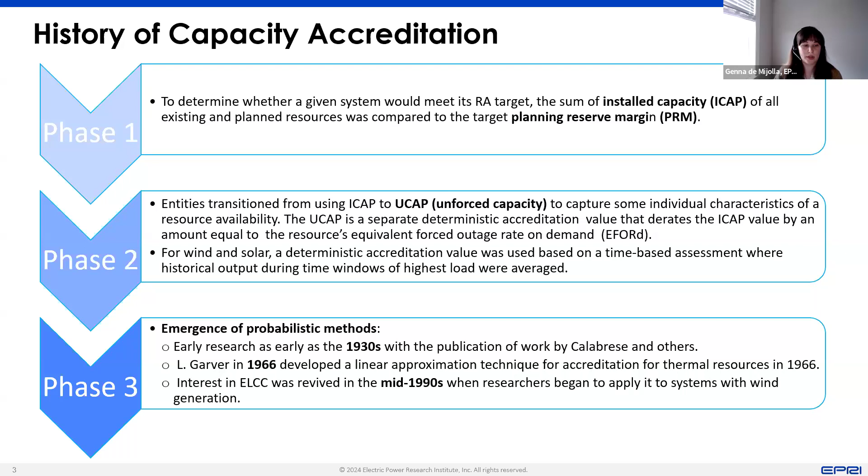Now in phase 3, we're really starting to lean more and more on probabilistic methods, ELCC being the best known one. I do want to highlight that some of the groundwork for these probabilistic methods started a while ago - the 1930s had early research on this, and 1966 saw work on developing a linear approximation technique that was really instrumental. But it wasn't until the mid-1990s that we started looking at ELCC and considering it much more seriously, applying it initially to at least systems with renewable and especially wind generation. So that's a quick overview of the history of capacity accreditation.

The next thing I want to touch upon is this idea of probabilistic versus deterministic metrics. If you think about the history I went over, initially we were more on the deterministic side of things.

So your ICAP and your UCAP, and looking at average generation over historic peak hours, those are all considered deterministic methods. You don't necessarily need to run a probabilistic resource assessment to determine capacity accreditation with those methods.

And then we've got the whole probabilistic piece of the puzzle. I'd say there's two broad categories there, and you can split it up a few different ways, but this idea of marginal versus average accreditation. I won't touch on that too much since Kevin has a talk on that right after me, but it's a useful framework to keep in mind.

One thing I want to highlight is I've noticed that ELCC is sometimes being used increasingly to just refer to everything on that probabilistic accreditation method side of things. ELCC does have a specific methodology to it historically. There are other related methods that are also probabilistic and share a lot of common features with ELCC, but might not be exactly categorized as an ELCC metric.

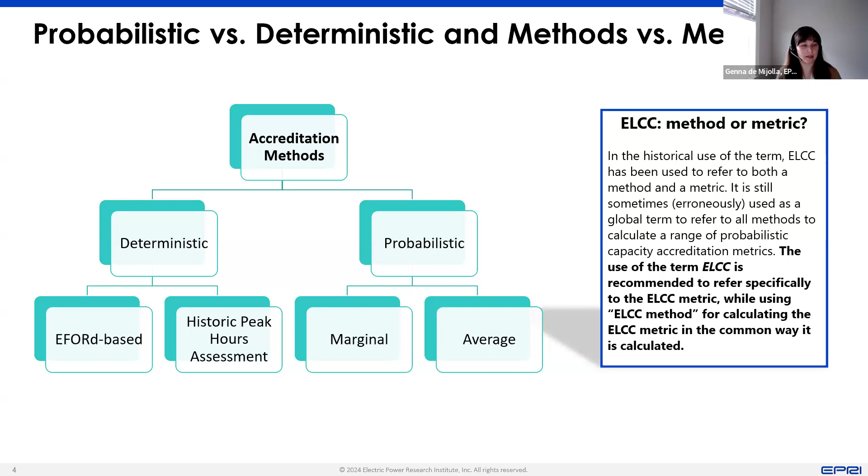The other thing I wanted to touch on is this idea of bringing a system to criterion, and that's been the norm. Often we use an LOLE of 0.1 days per year, at least within North America. That's been our historical reliability target. So most of the time, you establish that target and then bring your system to criterion before calculating your capacity accreditation metric.

This can be done a few different ways. You can adjust your load up or down, add perfect capacity, or adjust the retirements in your system. There's a few different ways to go about this, usually a bit of an iterative process. But it's important to understand that the way you do this is going to impact the value of your capacity accreditation calculation.

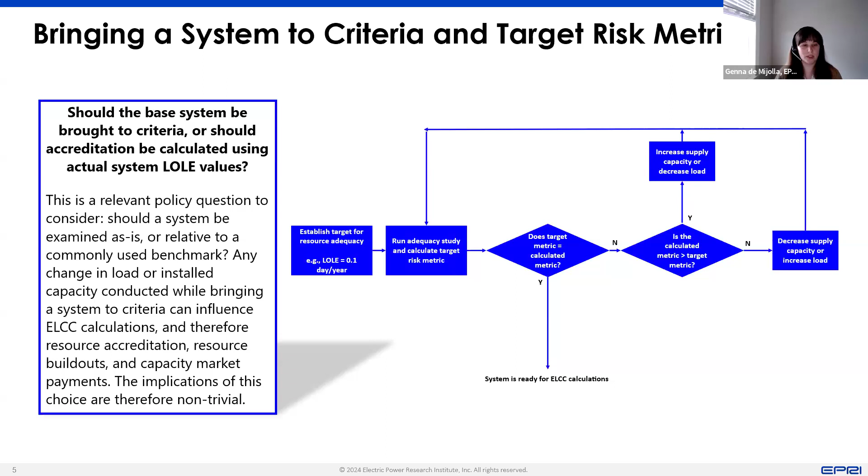So it's non-trivial, and it's worth reflecting on whether your system should be brought to criteria, or should it be calculated using actual system LOLE values. If you bring it to criterion, what should that criterion level be? Because it's going to influence the system, and by extension, your capacity accreditation values. Something to keep in mind there.

The next few slides, I want to highlight a few of the primary capacity accreditation methods, especially the probabilistic ones that we see. The first is ELCC, and I think this is the one most folks are familiar with. I do want to highlight there's another method called equivalent firm capacity. It's very similar to ELCC, and they're sometimes used interchangeably, though they do have a few slight distinctions.

Now, equivalent firm capacity is a really similar concept. Again, you start at your 0.1 LOLE. You remove a resource instead of adding it, and that increases your LOLE a little bit. Now, instead of modifying the load of the system, you actually add perfect capacity back into your system until it's brought back to that 0.1 LOLE criterion. The amount of perfect capacity you add back corresponds to your EFC value, your equivalent firm capacity value.

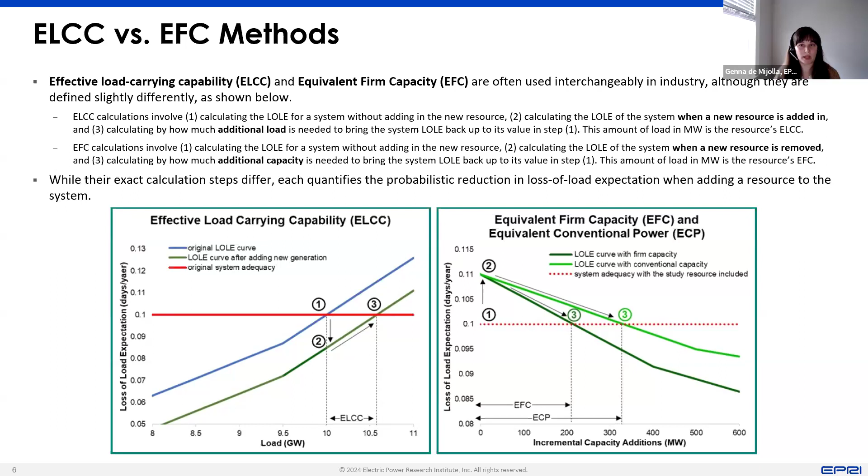Now, there's another method that's been developed, which is your marginal reliability improvement method. And one of the things that some folks like about this method is that you have sort of a set number of iterations. Once your system's at criterion, you'll have 2 extra set of simulations to run. And so the way that this works is you, again, start with your LOLE that's defined at criterion, usually 0.1 days per year.

And so the first simulation you do is you add some level of megawatt corresponding to the resource whose accreditation you're trying to evaluate, and you evaluate the resulting LOLE of the system. And then you do that again, but instead of adding the specific resource you're looking at, you add in perfect capacity of the same size, and you look at the LOLE of that resulting system. And so the marginal reliability improvement is calculated as the delta difference between those 2 values. So your change in LOLE when you have the resource you're evaluating over your LOLE with that perfect capacity added in. And that's your resulting capacity value.

And I will say I've seen MRI calculated a couple of different ways. I've seen it defined with LOLE. I know ISO New England's defining it with EUE, so there's a little bit of nuance there in terms of how it can be calculated, but that's the general idea.

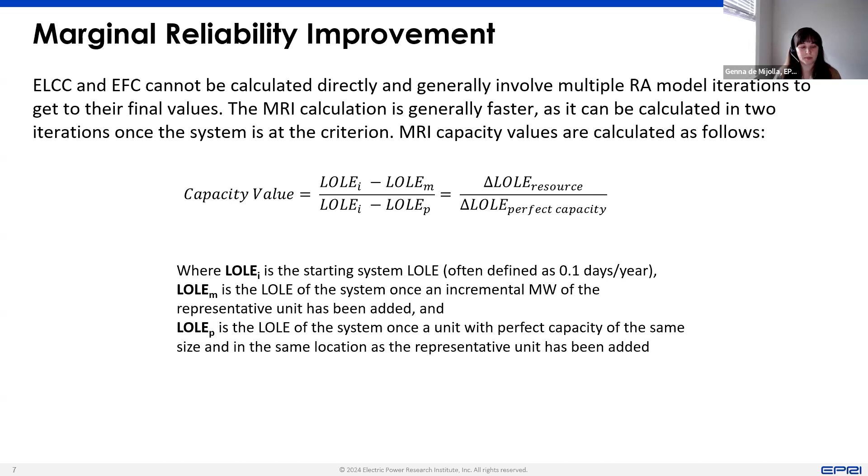The last metric I want to touch on is this idea of LOLP capacity factor method. It's something that was put forward in the recent ESIG report around capacity accreditation. Not that it was necessarily new there. I think there's been some work done previously for it, but they do have a good illustration of it.

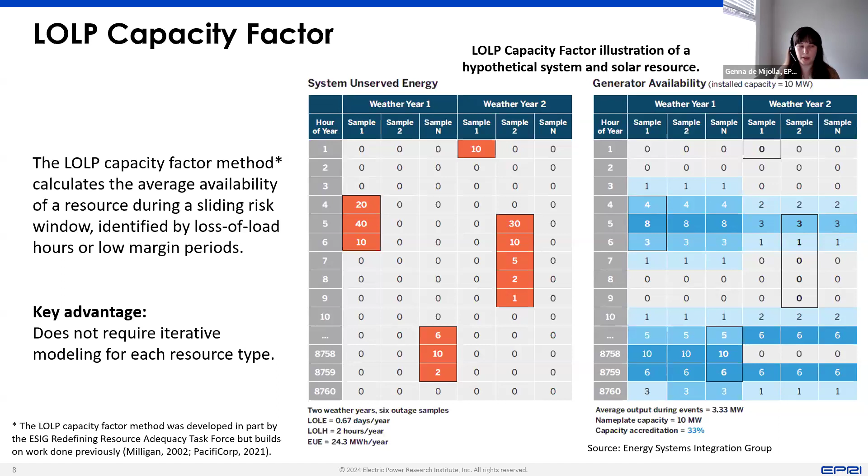So one thing I want to touch on here is the fact that there's so many different ways to go about these capacity accreditations. I've sort of scratched the surface here, but there's a lot more that could be said, even about this marginal versus average discussion, which I think Kevin will get into. There's this idea of prospective versus retrospective. Are you looking at historical unit output? Are you using the forecasted unit output?

And even within a same method, I think there's a lot of variation that can be had. So historically, ELCC has been calculated with LOLE, but there's no reason you couldn't calculate it with EUE or LOLH or some other metric. There's variation and nuances in terms of the perturbation method you applied. You add or remove your capacity? Do you increase load? Do you increase perfect supply?

The choice of your resource adequacy target - if you use that 0.1 LOLE target versus not is going to influence your results. How you bring your system to that target is going to have an impact on results. If you consider that LOLP capacity factor method I just talked about, they were advocating for looking at the straight average across all unserved energy hours, but you could instead consider some kind of weighted average where the most severe hours are weighted more heavily. You could look at close call hours where your system's maybe not explicitly in a shortfall event, but has very low margin. So there's really so much nuance in terms of how you can go about looking at this. And that's something I wanted to highlight to this group.

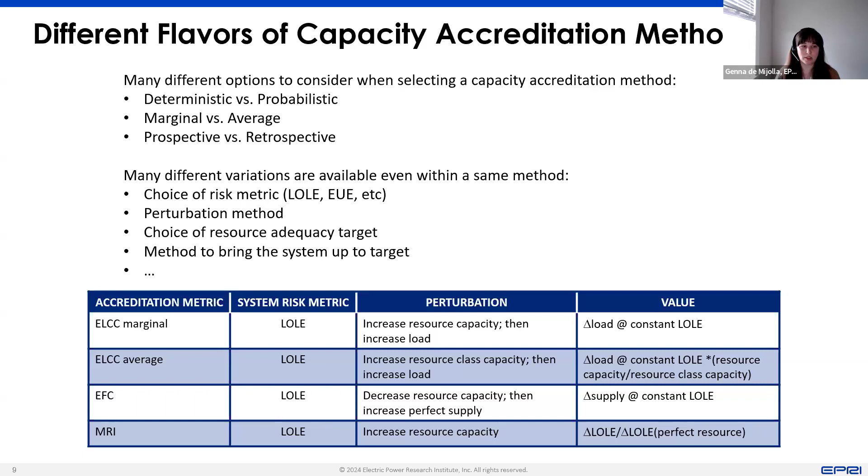A few key insights as well that I wanted to highlight that we've come up here at EPRI. The first thing to keep in mind is typically when you look at the adequacy of a system, there's not very many risk hours. If you've got an LOLE of 0.1, it's really a handful of hours at risk, if that. So your resource accreditation methods, if they're calculated using these probabilistic methods, are really obtained during a relatively small number of hours in the year.

So however your resource performs within those select few hours is going to really impact its capacity accreditation value.

The second thing to keep in mind is this idea that accreditation depends both on individual unit characteristics, which feels pretty intuitive, but it's also really dependent on the LOLE shape of the system. So two resources that look completely identical from an individual resource characteristic side of things could have vastly different capacity accreditation values depending on which system they are located in.

The third insight is that risk is not necessarily correlated with peak loads. We see that increasingly as we have growing shares of renewable resources. We're seeing a lot of that risk shifting to net peak load periods. But even within that, you could have a risk period that really doesn't look that risky from a demand point of view, and maybe has a big fuel shortage or something like that that's modeled. And that could be where you're seeing a lot of your loss of load risk, and that's where you would need your resources available.

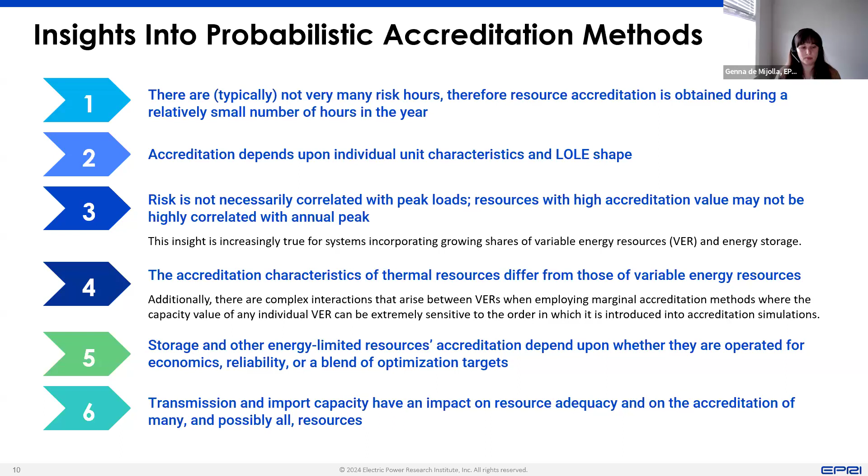I want to change gears here a little bit and talk about things that aren't necessarily traditionally thought of as capacity accreditation, but these probabilistic methods are all based on core models that have a lot of complexity built into them. They use different tools from one model to another. There's a lot of different data inputs you can put in there. And these things, I'd argue, might have an even larger impact in some cases on your capacity accreditation results than the specific method you're using.

So it's important to keep that in mind as you're going through the capacity accreditation method, that whether or not you're modeling short-term forecast error, how you're modeling your energy storage, what kind of data you input into your model is going to be hugely impactful on your results from a capacity accreditation point of view. That's something worth spending the time and effort on to make sure you get right.

And then another thing that we're thinking of at EPRI is this idea of operational features within resource adequacy. Traditionally, operational features just haven't really been incorporated into resource adequacy models, just because it's so computationally expensive to really incorporate that fully.

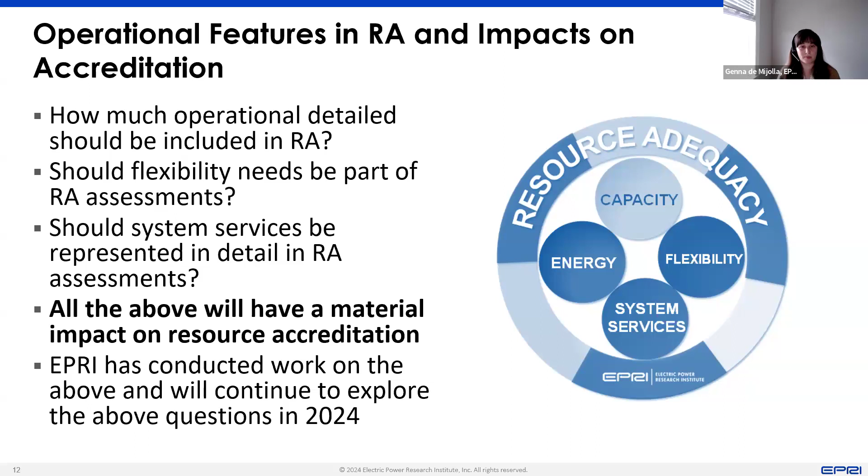And then finally, a little bit of a whirlwind here, but I want to touch on a couple of EPRI initiatives and public documents that have either come out or are soon going to be coming out. So the first is our Resource Adequacy Initiative.

If you haven't heard about it, it was a multi-year initiative we had here at EPRI, and it really looked at the core model, the core probabilistic assessment features. We came up with recommendations around what metrics should be utilized, how individual resource models should be set up, what data sources we recommend, and did an evaluation of the various resource adequacy tools that are out there.

The second thing I want to highlight quickly is some of our upcoming resource adequacy efforts. We're really going to be focusing on the interaction between capacity expansion models and resource adequacy models. Those are two processes that ideally should be very closely linked and coordinated. That is not always the case, but we're moving towards that more and more. We want to provide guidance on how you can bridge the gap between capacity expansion modeling and resource adequacy modeling.

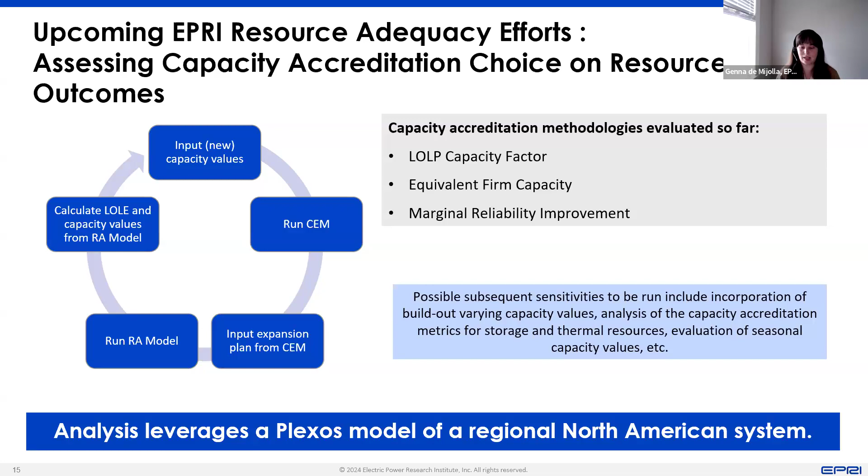But that's, I think, all I have. So I don't know if I can see the chat. I don't know if there's any questions in there yet, Elliot. We don't have any yet. Certainly encourage all the participants to drop them into the Q&A or the chat, really either one works. And Genna, great presentation, really well done. Sets the stage and lays the foundation here. So thank you again. No problem.

Okay, I'm not seeing any other questions in the chat or the Q&A, so we'll keep moving here. Actually, one just came in. Here we go. Okay, so yeah, I guess the chat is disabled, but would recommend that you use the Q&A feature. All right, moving along here.

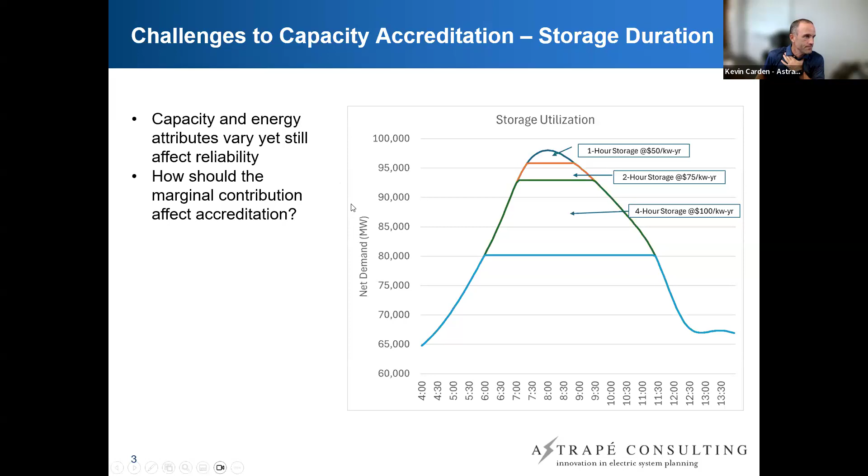So significant needs in the summer, that's where we expect most of the reliability events to occur. But during the spring and fall, where we have significant maintenance scheduled, we could also surface reliability events. And we actually saw some prices in the fall and spring in last year's seasonal auction that reflected there is some potential for risk in the spring and the fall. What are the implications for scheduling maintenance? Typically, what's going to happen with a maintenance schedule is a generator may request a particular schedule, or they may be given a particular schedule that says we're going to put this resource at a particular time window in the spring or in the fall.

You need 30 days on maintenance, we'll put you in that time window. Most of the selections are done from a system perspective. We're not trying to optimize for each individual resource to make sure he gets the most credit in an accreditation framework. It's really, how do we protect system reliability? It may be that one resource gets put into a higher risk period in the spring or fall, and another resource gets put in a low risk period. But they both had the same objective.

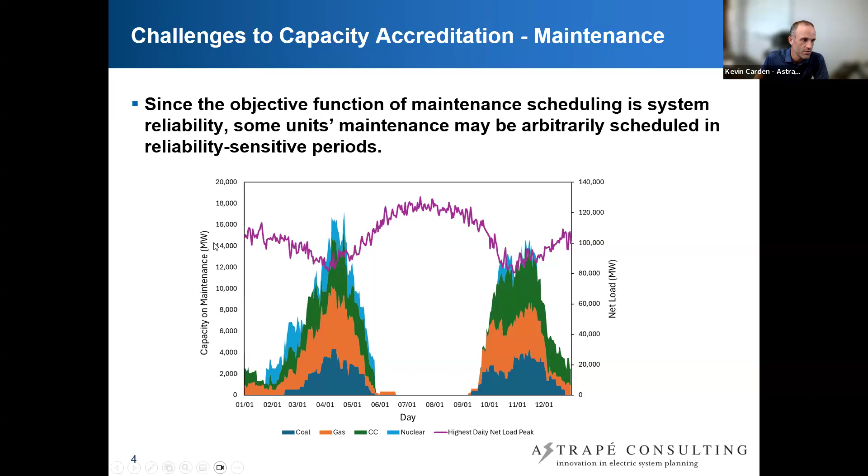Another item - and both Genna and I have already flagged this - is that most reliability events occur in a very small window of hours. If we're running hundreds of thousands of hourly simulations, modeling to a 1-day-in-10 standard, that's a very small window of hours in which we'll shed firm load. The performance of these resources is contingent on how they do in this very small window.

But if I think about managing reliability from a practical standpoint, I think about Texas last summer when we had 45 days in a row with temperatures above 100 degrees in parts of Texas. If we hadn't had the wind and solar fleet, we would have shed load every single day in that period. But if I look at the worst day, wind and solar output is very low - they get very little credit. What does that do for their incentive to be available during that 45-day window of really high temperatures? We need to take those considerations into account.

I think Arnie's going to talk about that as well - how do we incentivize performance and make sure you provide reliability not just in that 1-day-in-10-years scenario, but in each critical day that occurs every year.

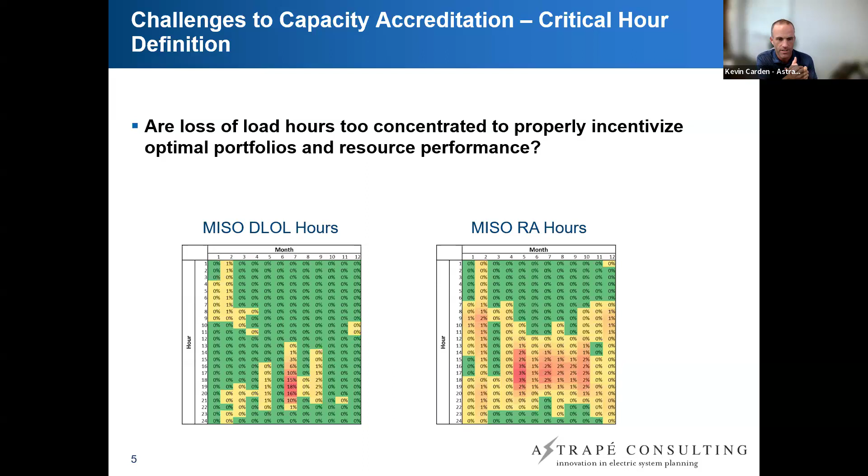So one thing we've looked at for certain entities is perhaps the top 3% tightest hours in a year, top 30 hours per year. There are various constructs looking at this - in Texas with the performance credit mechanism, it's the highest 30 or tightest 30 hours per season as the measurement window for how resources get accredited. There are different ways of doing that, but ultimately we need some understanding of the alignment between these modeling efforts and how resources are expected to perform and measured in actual practice.

And that's the end of my presentation. I'll hand it back over to you, Elliot.

Kevin, that was great, thanks very much. I think we did have one question that popped up a little earlier in the chat, and this one was actually for Genna. Genna, I don't know if you're able to jump back in here.

The question was: are the operational considerations for resource adequacy assessments that you mentioned the same thing as energy adequacy assessments?

Yeah, I answered it briefly in the chat, but happy to expand. We're really looking at going even beyond energy adequacy, which is something fairly accepted within the adequacy framework, especially as we get more storage resources in the system. When I talked about operational aspects, we've been referring to it as flexibility adequacy within EPRI - incorporating things like ramp rate constraints, short-term forecast errors, and similar components. It does beg the question: how do you incorporate that within the adequacy framework? Should you incorporate it there, or instead look at deterministic runs to supplement probabilistic analysis? It's a bit of an open area for exploration, touching on operational constraints more traditionally associated with production cost modeling, and to what extent those should be considered within the resource adequacy framework.

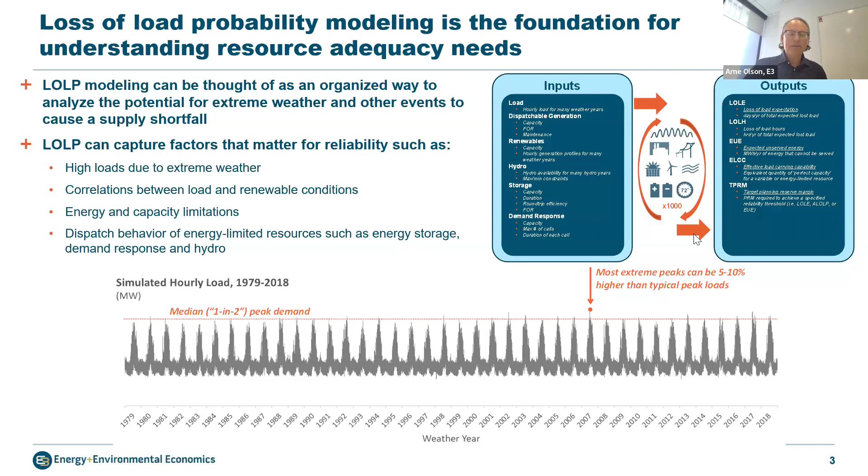So we use this loss of load model in kind of a three-step process. First, we develop a really robust and hopefully very accurate data set. This is increasingly challenging, as we'll discuss, because the weather is changing under our feet, and we can see that in the data. So we need to have some method of altering or thinking about what the weather trends or climate trends are doing to our weather data over time. But we first assemble an accurate data set.

We then do a whole bunch of simulations to identify the quantity of what we call perfect capacity that would be needed to achieve the desired level of reliability. I'm just going to use 0.1 days per year of loss of load, 1 day in 10 years, throughout my presentation, but recognizing that there's lots of other ways you could measure that and lots of debate about whether that's the right method or what other metrics can be used. We should just think of this as these events should be very rare.

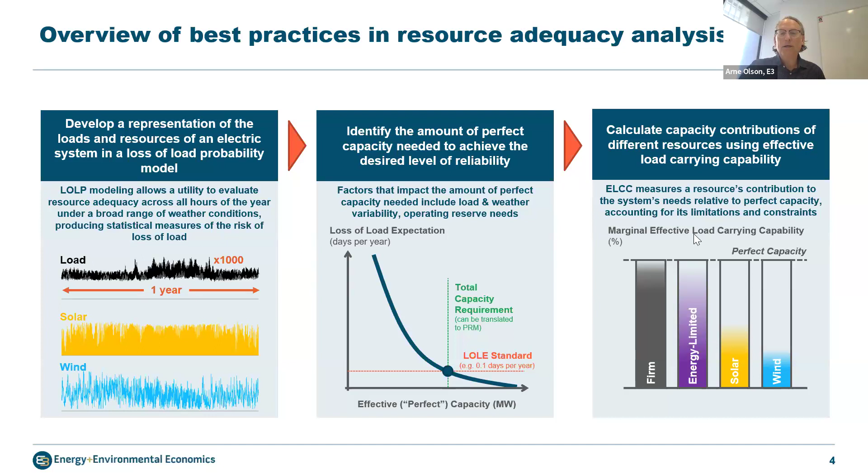And then starting from that system, that's calibrated to meet our loss of load standard. It's at criterion, as Genna mentioned. We then calculate what the marginal contribution would be of specific resource types towards helping us meet that need. And that's kind of the multi-step process to get all the way through to the accreditation, which is what you need at the end.

So again, the first step is to calculate the total need. The function for the total need will look like that function you see on the right there. As you add more capacity, you're moving out along the x-axis. The expected amount of loss of load will decline, so it'll have a downward sloping shape. And the idea is to find what's the right balance between the expense of adding more capacity and the benefits of reducing loss of load.

Again, 1 day in 10 years is typically what the industry uses, but it doesn't have to be. There may be other methods that are useful. Then you can take that total resource need and derive from it a planning reserve margin. You do that by taking the total need, and you typically subtract out the median peak, and then you divide that by the median peak. Median meaning sort of expected or 1-in-2 average peak. And you get a reserve margin.

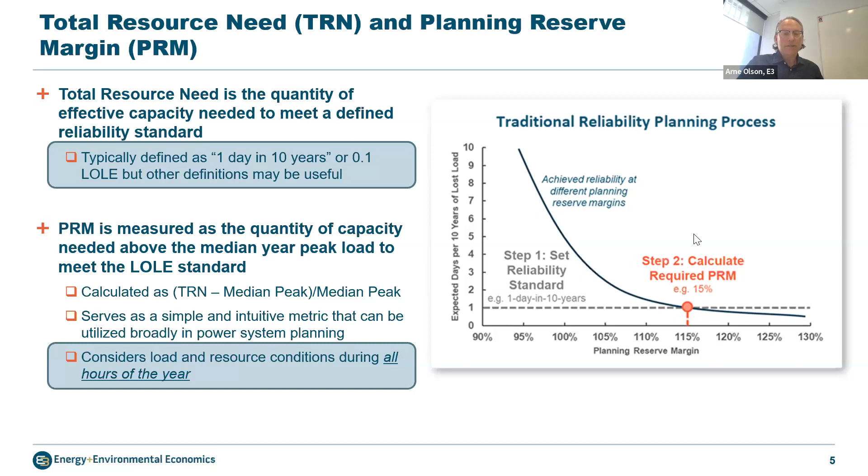It might be 10 or 15 or 20%, something in that range. You should recognize that the reserve margin is a derivative calculation. The key numbers are the total need and the median peak load. It's helpful to have a reserve margin so that you can estimate what your need might be without having to go through a whole series of complicated loss of load calculations. But it's a derivative calculation that itself doesn't determine the need. It's derived from the analysis that determines the need.

I think it's well understood by now that when you look at resources available to help meet the need, some of the variable and dispatch-limited resources have declining marginal effectiveness as you add more, and some diversity benefits when you add them in combination. So I've got a couple of slides just to illustrate those effects.

I think it's pretty easy to understand that the more solar you add, the less challenges you have meeting load during the middle of the day. And we're already seeing in California and the Southwest that it's really after sundown when we have the hardest time meeting our load.

A similar effect occurs for battery storage, and Kevin kind of already illustrated this: a little bit of very short duration batteries can be very effective, but then as soon as you've added those, you have to go to longer and longer durations in order to have the same marginal effectiveness. So the marginal ELCC of batteries also declines as you add more of it.

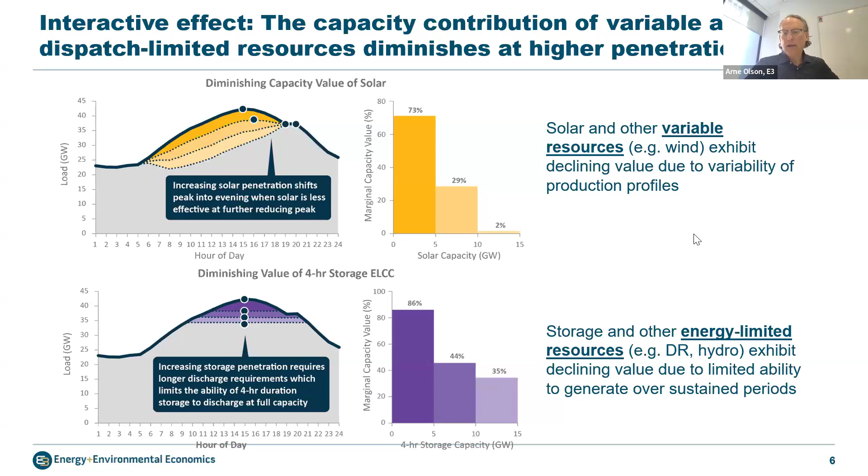But then if you add solar and battery storage in combination, they actually are complementary to each other, such that the whole is greater than the sum of the parts. And this occurs not because solar is charging batteries necessarily, but because of the diurnal shape of the solar output and the load shape.

So if you have a whole lot of solar such that you really don't have any problem meeting load during daylight hours, that really compresses the window in which you need battery storage to be able to discharge. You can see in the middle, if you're just using battery storage and it's trying to clip the peak during the middle of the day, you need to have a lot of duration. If you add solar, then you only need to worry really about 6 to 10 p.m., or maybe 7 to 10 p.m.

So it really enhances the effectiveness of batteries at helping to meet that residual remaining peak after you've already clipped a lot of solar. In this example, you can see that the solar by itself gives you 5.2 gigawatts, the storage by itself gives you 8.3. When you add them all up, you actually get 15.2. So there's an extra 1.7 gigawatts of diversity benefit that you get from the combination of solar and storage.

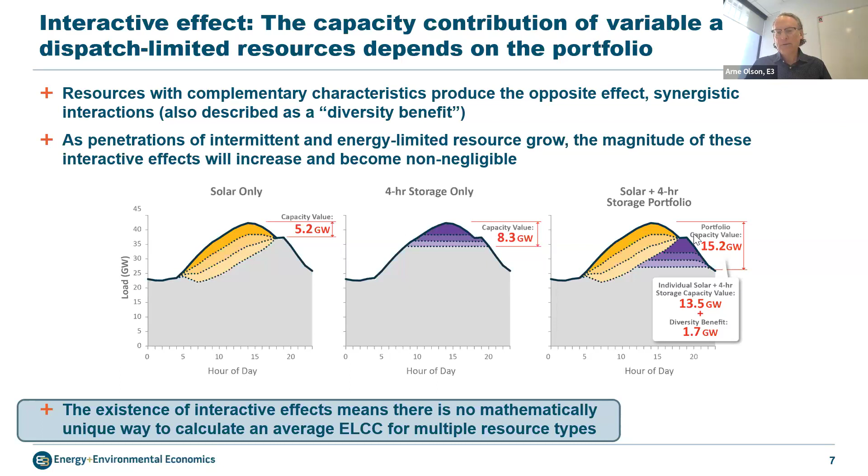It turns out there's not really any accurate or unique way to allocate that additional 1.7 gigawatts of benefits between solar and storage. It's necessarily arbitrary. It's really the combination of the two, not just one or the other, which is the one thing that should give you a red flag about an average ELCC, because any averaging would necessarily have to use an arbitrary method of allocating that diversity benefit among the resources that are contributing to it.

But then there are other examples of synergistic pairings. In particular, solar and wind tend to be synergistic or complementary, because wind tends to blow at night and it tends to blow in the winter, which is obviously the opposite profile of solar.

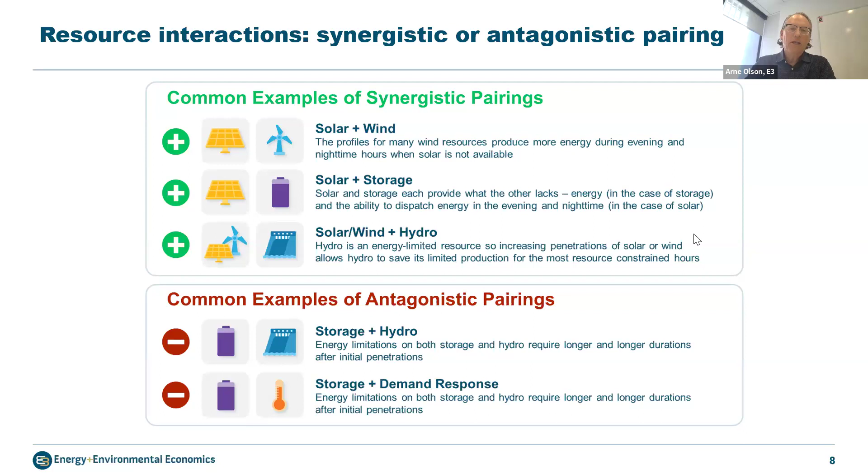So how do we add all of this up then? I'm going to start with kind of our simple world that we've inhabited in the past and really up until now, where if we're really only using thermal resources to meet our resource adequacy needs, and if they all kind of more or less look alike, if there are small differences in their forced outage rates, there aren't really any interactions among these resources.

So what we could do in this kind of simple system is just add up all the nameplate capacity from all of the resources, throw in a reserve margin to account for the fact that sometimes not all the resources are available due to forced outage. But then just add up the nameplate, make sure it's greater than your load plus your reserve margin, and you're good to go. So that's what's represented by the bottom left equation there — it's just a simple sum of the nameplate capacity of all of the generators.

We call this the installed capacity, or ICAP method, and it was used for decades by most of the system operators. It was always a bit of a simplification, and we recognize that. So people have moved toward UCAP, which takes into consideration resource-specific forced outage rates. It adds one step of complexity to this, but it still is largely just a sum.

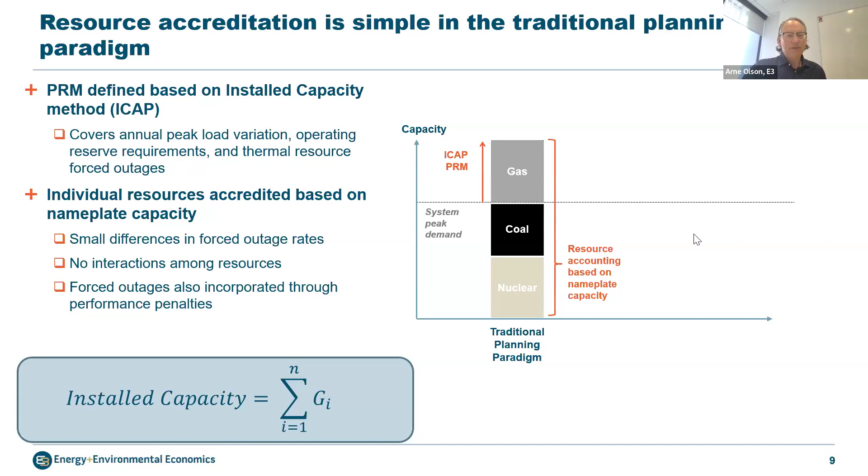But we've already seen that there are now interactions among resources, and there are now large differences in resource availability during key hours. So we can't really use this linear sum anymore as our way of representing the contribution of resources toward that need. We now have a situation in which the total amount of capacity that we get from our portfolio of resources, the portfolio ELCC, is a complex function of all of the resources that are available on the system and the interactions among those resources. The concepts are similar, but we just need to enhance our modeling capabilities and the way that we think about these interactions to move this framework into the modern world with our new resource types.

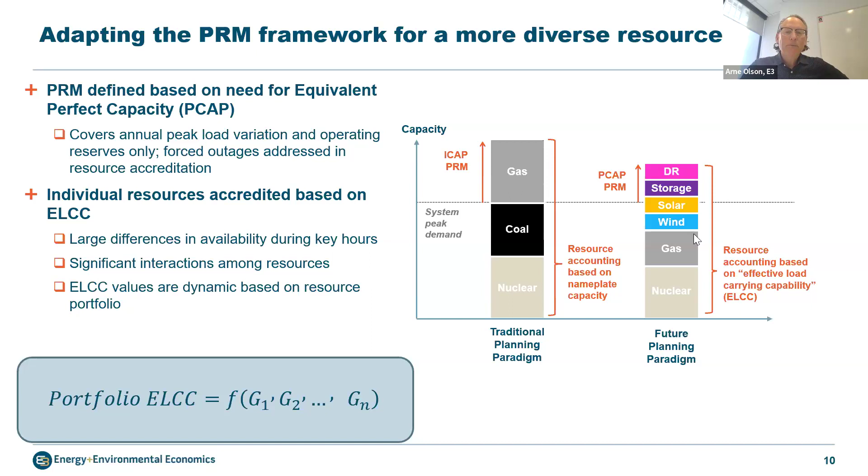What we're interested in with respect to each individual resource is how much it's helping us meet our total need. We need to understand this on the margin, based on the portfolio that we already have existing. If I make changes to that, how does that change my total need? Mathematically, that's the partial derivative of the portfolio ELCC function with respect to a change in one dimension, that dimension being a specific resource type. So that's the mathematical derivation of what this marginal ELCC is.

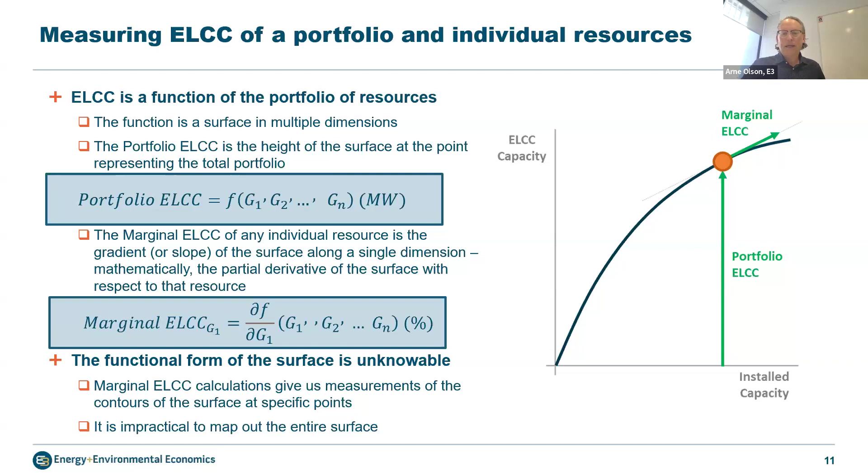So we are big advocates of an ELCC-for-all approach, and we think that, as Zach will talk about, the direct LOL approach that MISO is taking is basically a form of this. I'll mention some of the other terms Genna mentioned - the equivalent perfect capacity, the marginal reliability improvement - these are all just different ways to measure marginal ELCC. They're different measurement techniques, but they're all trying to measure the slope of that line at very specific points to help us understand how those resources are helping us meet our total need.

Since we're using a marginal ELCC for each individual resource to understand the total amount of capacity that we need, we use what's called an equivalent perfect capacity, or PCAP, type of approach for the accounting of total need, as opposed to an installed capacity or unforced capacity type of approach. So how much perfect capacity would we need? How do each of these individual resources compare to that perfect capacity? And if we add them all up, do we have enough perfect capacity equivalent to meet our loss of load standard?

This is the approach that market operators would take when evaluating the accredited capacity of individual resource types for use in a capacity auction, or in some type of bilateral capacity construct like the WRAP will have in the West. Zach will talk about this in detail - the application in the market construct is that you use the marginal ELCC values to clear the auction, and those auctions happen on a periodic basis. As the portfolio moves, the marginal ELCCs get updated so you're always measuring the marginal contribution of all the different resource types, given the portfolio you have at the time.

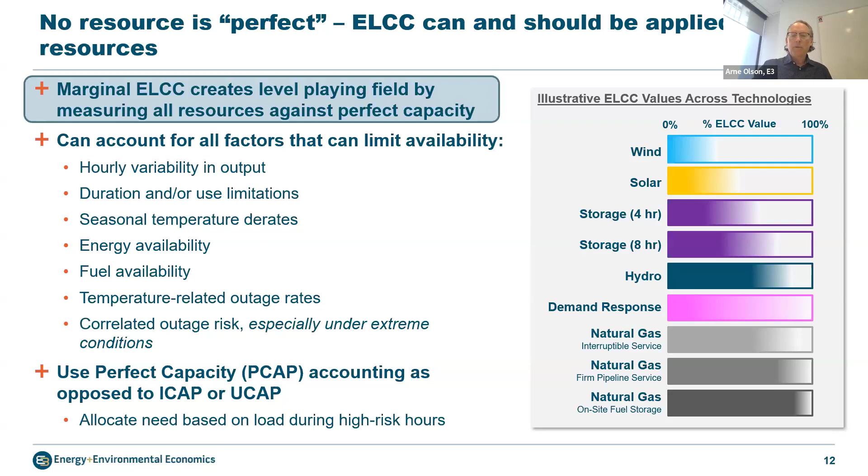There are additional applications of this in the resource planning space, and I want to take just a minute to talk about those applications.

And this is particularly, well, there's those two kind of categories. So let me just start by noting that most utilities use long-term capacity expansion models, LTCE, or capacity expansion modeling, to evaluate different portfolios of resources within their IRP context. And all of those models will have some form of resource adequacy constraint that constrains the portfolio optimization to ensure

If the utility is in an organized market, then as we talked about at the beginning of my presentation, all of the parameters for the resource adequacy need and the resource accreditation will be determined by the market operator. So for those utilities, what they really need is a forecast of how much need will be allocated to them from the market operator, and a forecast of the ELCC values that will be used in the capacity auctions over the next, X number of years, 10, 15, 20 years, the lifetime of the resources that they're considering. So it's really not a function of their own power systems because they're part of a larger regional construct. Their resource adequacy need is determined by the market.

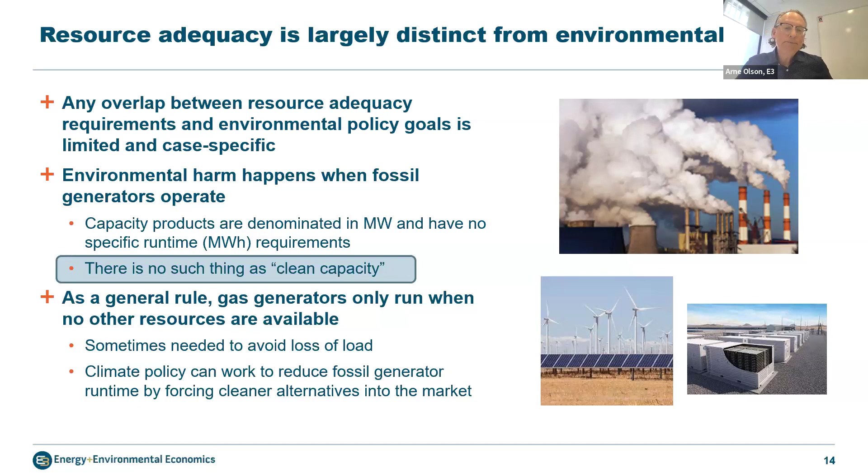Lastly, a highlight of some of the challenges that practitioners of these methods are facing, given all the various aspects we have today. Some of the questions being discussed are: what is an appropriate reliability standard? Nobody likes the 1-day-in-10-year standard. Some people say it's far too onerous, that it doesn't match up, and the cost of meeting it is much higher than measured values of lost load from customers. So maybe it's too stringent.

I'll just note that whenever we have one of these events, we end up with a lot of political interference in energy markets that itself can create very costly and inefficient outcomes. So I'm not sure if it's stringent enough, but there's a debate about that, and it's a debate we should be having and continue to have.

How can we get more price responsive demand into the market to help us avoid the need for steel in the ground? Adapting weather for climate change, the weather is changing measurably and noticeably in our data sets. It's very easy to draw a trend line using the data we have, so that trend is going to continue. How do we modify our data so we're capturing expected future conditions, not just conditions from 20 years ago that are less likely to repeat in the future?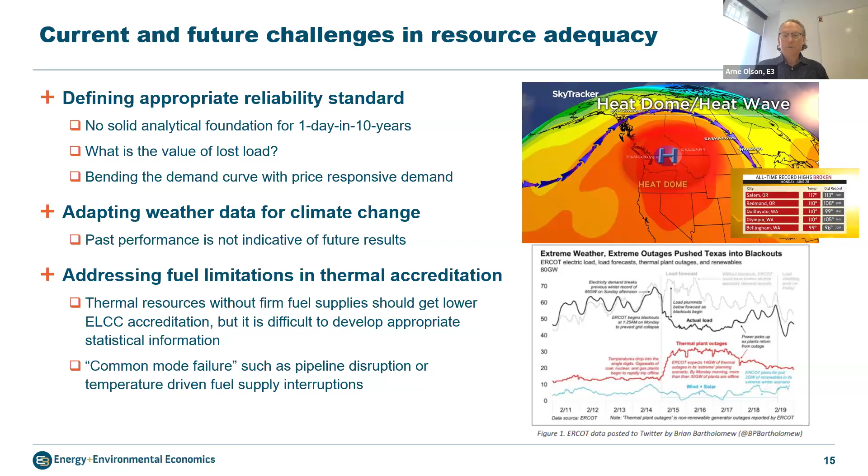Addressing fuel limitations in thermal accreditation is another hot topic, especially after Winter Storm Uri and Winter Storm Elliott, when we saw some resources couldn't get fuel, couldn't perform, and we had loss of load events or very near loss of load events as a result. That's a significant issue that a lot of people are working on.

So I think with that, I'm done with my prepared remarks. Let me see if there are some Q&As.

Arne, I'm happy to read them out, if you like. Sure, we have one from Marcus Hawkins.

Thanks, Marcus. For assignment of need, do you allocate the need based on historic load or need during the risky hours, or the projected need during the risky hours?

I think you're talking about allocation of system-wide need to individual load serving entities, and Zach's going to talk about this a bit in his talk as well. What we typically have done is use a modeled or expected 1-in-2 peak, and said since the loss of load events occur during the peak load hours, what is every LSE's contribution toward that peak? You do it on a model or expected basis, so it will take historical data into consideration, but it will set that historical data in context with the broader set of weather conditions you might be expected to encounter in the future.

Because our loss of load hours are changing as the system portfolio changes, Zach's going to say that we should be moving from a contribution to gross peak to contribution to net peak, not just as the time period to evaluate the capacity contribution of generators, but also for allocating load to the individual LSEs, so that we're sending the right price signal to loads as well.

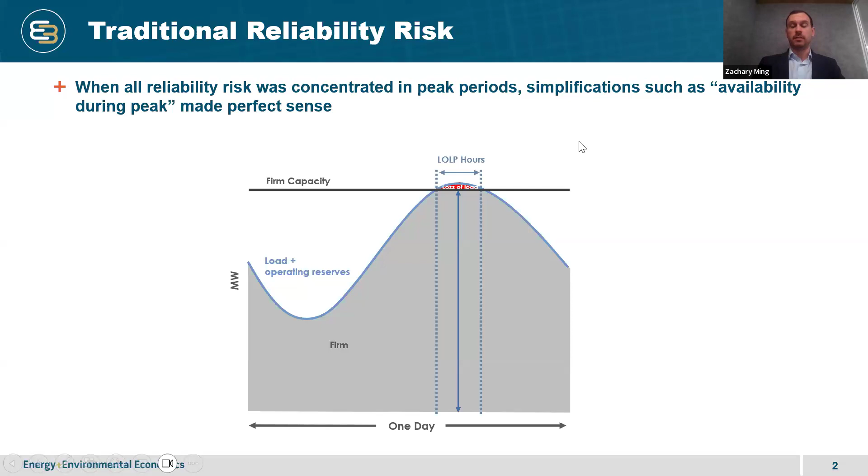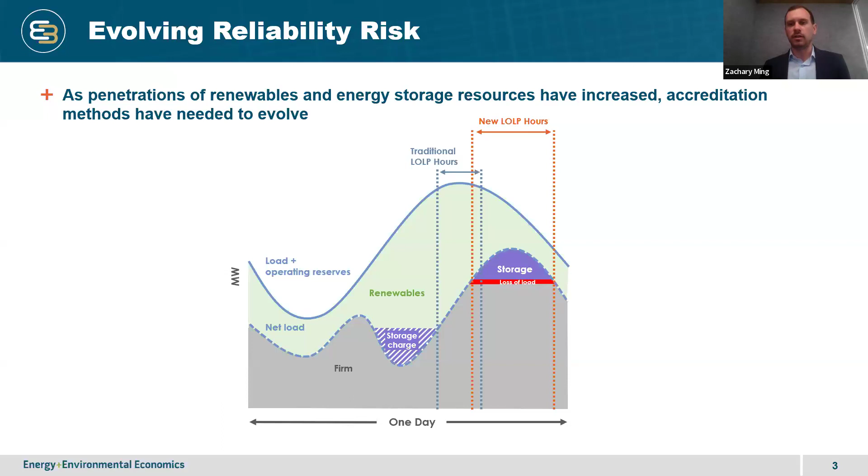This is roughly the problem that the ISOs are facing today. Every ISO is at a little bit of a different stage as to exactly how many renewables and how much storage are on the system, but some ISOs are already here, some are on their way. Everybody's thinking about how to design markets around meeting reliability during this new challenge that the system faces. And so that's really where we get into the three broad categories of resource accreditation that ISOs are using.

If we look at this system, we can see the gross peak, the top of that chart, is in the middle of the afternoon. If we just measure the availability of a resource during that specific hour, we get something like availability during peak. Ten years ago, this is what ISOs were doing to measure the capacity accreditation of renewables.

They were just looking at during the peak. And when you have very small penetrations of renewables, that makes sense. But what's the problem with this method?

The problem is that this is not a good indicator of a resource's overall contribution to reliability, because you could have a system where you just build a bunch of solar and meet all of your peak needs in the middle of the day. But as soon as the sun sets, you still have all of this reliability risk. Just looking at what a resource is doing during the single peak hour is not indicative of its overall contribution to reliability and how much it can mitigate the need for other reliability resources.

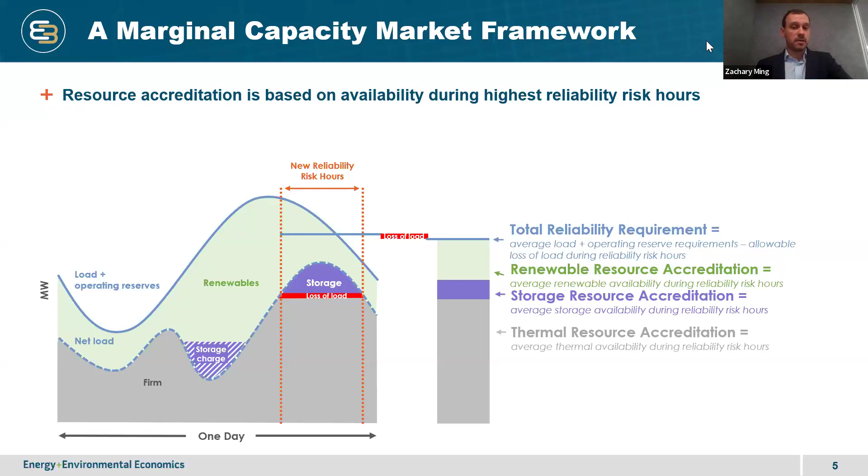They're procuring capacity for other hours that are definitionally lower hours, lower load hours, but they're higher reliability risk.

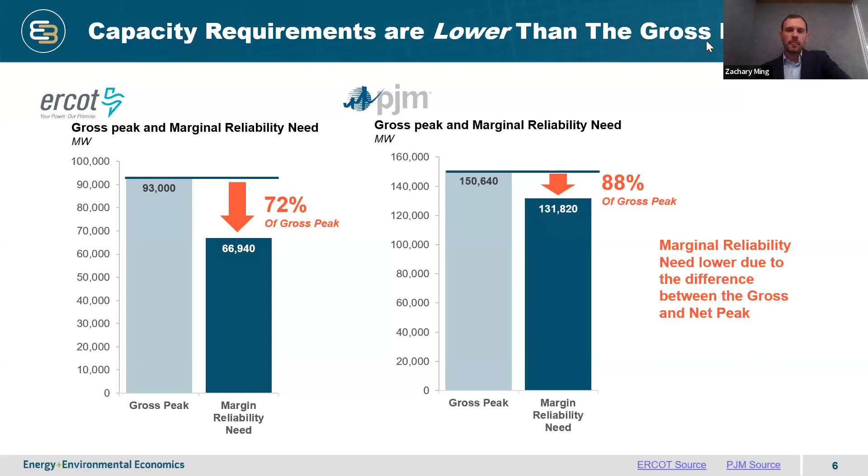And that's when the system needs capacity, and that's how the total amount of capacity that's going to be procured, and the time periods with which resources are accredited based on their availability during those hours. So all of that is a setup to the main punchline, which is, what is everybody actually doing?

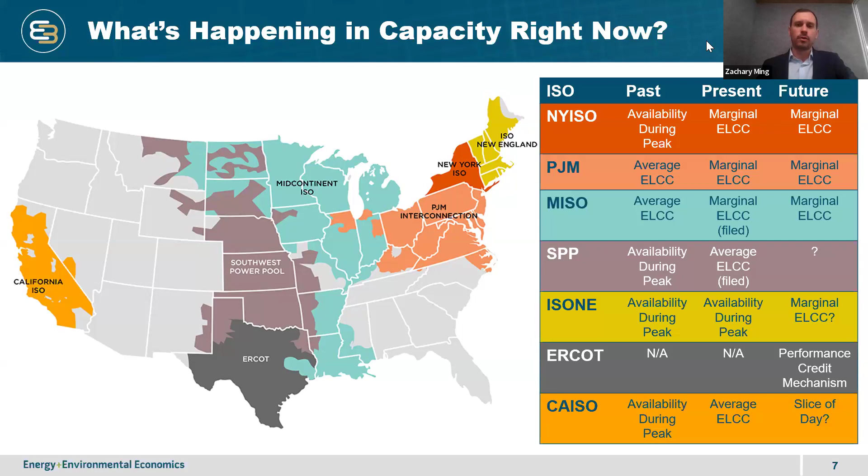PJM filed theirs with FERC, the end of last year. It was approved early this year. So this is a highly live issue. SPP has a filing that's being contested with FERC right now. Things are changing on a really week by week basis. But I did just want to walk through at a high level what's happening at the different ISOs.

So let's first focus on the ones that are moving to a marginal framework. Those are the three we've highlighted here. The very first ISO that said, yes, we're going to a marginal ELCC framework was NYISO. They made that filing in late 2022, and it was approved by FERC shortly thereafter, and they are well on their way to a marginal ELCC capacity accreditation framework. It works functionally exactly like I illustrated on the prior slides. So they were really a very early mover, ahead of the pack.

PJM made a filing late last year in October. They received approval early this year. And so they are well on their way to running their next capacity auction using a marginal framework, setting requirements based not on gross load, but on net load, looking at resource accreditation based on their availability during the net load hours.

So PJM, that's the direction they're moving. They've received approval. And the third ISO is MISO, which, as I said, just last week submitted their filing to FERC to move to a marginal ELCC framework. They have not yet received approval, but I would likely expect that seems more likely than not, given that FERC has approved it in other ISOs. So there's definitely a precedent for saying that this is a just and reasonable market design.

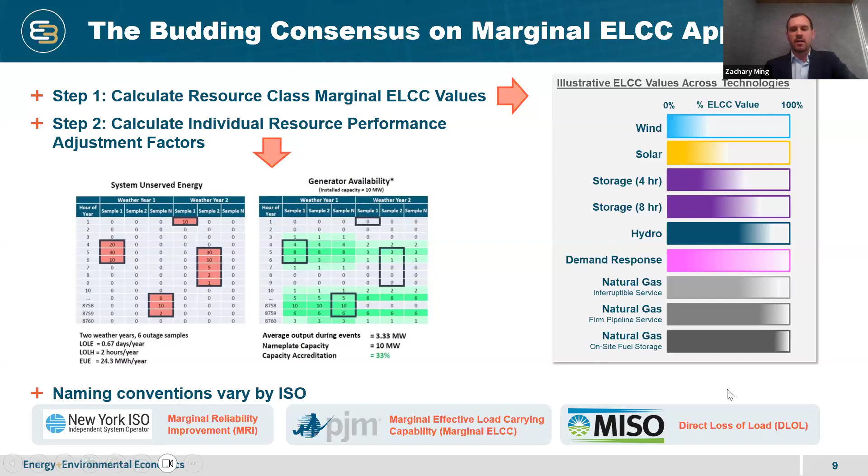Just kidding. But these, even though they have different names, they are all functionally the same thing. They're all marginal ELCC.

Those are the ISOs that are moving to a marginal ELCC framework. I want to call out a couple of ISOs that also have very live proceedings. ISO New England has previously indicated that it wants to move to a marginal ELCC framework. They've been doing a lot of work, particularly around modeling, but they've run into some challenges, so this has gotten delayed on their side.

They have some unique challenges in New England, particularly getting fuel to generators during winter cold snaps. That's a real challenge that needs to be reflected in their modeling, and it's one of the issues that has led to their delays. They've indicated they want to move to a marginal ELCC framework. They haven't exactly done it yet or made a filing with FERC, but that's a process underway that they're working very hard on.

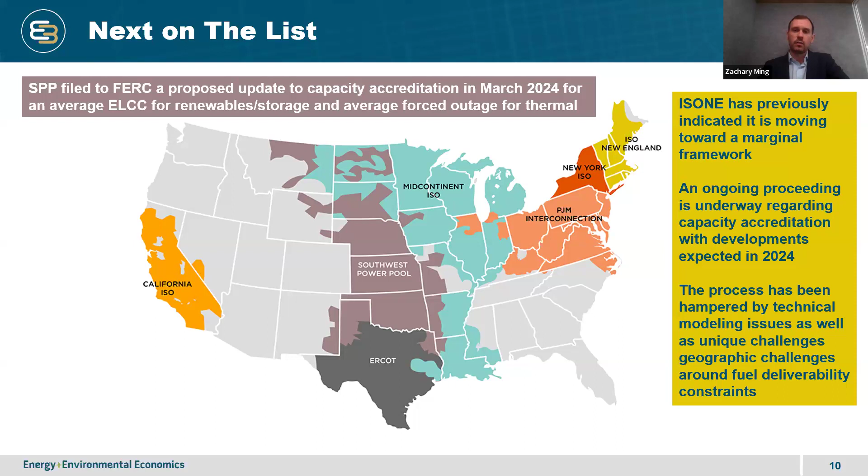SPP, in the middle of the country, just made a filing with FERC to update their capacity accreditation. They are not, at least based on their latest filing, proposing to move to a marginal ELCC framework. They're proposing to essentially move to an average ELCC framework for renewables and storage, and then accredit thermal resources based on an average forced outage rate. I think this is a very live issue for them, and there's been some stakeholder pushback, including from the renewable community, that this might actually be overvaluing thermal resources, which I'll talk about a bit at the very end of the presentation. But I think this is an open question as to what exactly is going to happen in SPP.

I mentioned there were two wild cards, California and Texas. I want to briefly touch on those. They're not really using a pure marginal approach in either case, but they end up getting outcomes that are functionally similar. This is illustrating what California is doing.

California essentially sets requirements for every load serving entity, like a utility or community choice aggregator, saying you have to procure sufficient capacity for each month-hour slice of the year. There's 12 months, 24 hours a day, that's 288 different compliance products. Right off the bat, that makes your head spin a little bit. Instead of one capacity compliance product, you have 288 capacity compliance products.

There's also a lot of complications around how you demonstrate compliance in a particular month-hour slice. What do you assume load is in July at 2 p.m.? What do you assume solar is in July at 2 p.m.? So they've come up with these percentile worst days. It's maybe theoretically possible to calibrate those to something reasonable, but you end up bending backwards and upright and backwards again, because a worst day for load is not aligned with a worst day for solar. In California, high load days are when it's hot outside, and when it's hot outside, it's sunny. So mixing and matching high load days with low solar days doesn't really make sense.

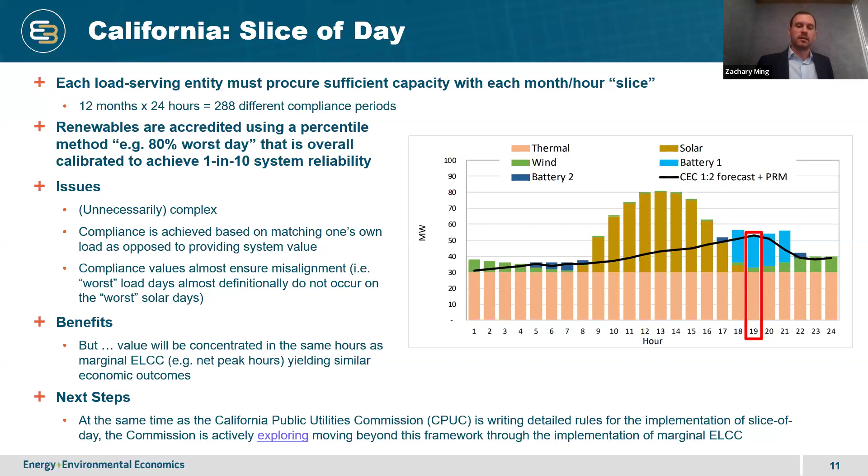I could go on and on about some of the challenges with slice of day, but suffice it to say, it's probably more complex than necessary and less accurate than necessary. But if done reasonably, it does ultimately concentrate value in the most challenging periods of the day, which are going to be the net peak hours, which in California right now are summer evenings. That's functionally the exact same signal that marginal ELCC sends. In fact, the California Public Utilities Commission is looking at potentially going beyond slice of day, looking at a marginal ELCC framework, and there's a market design proceeding underway to examine those exact issues.

Texas, I'll briefly touch on. They are doing what's called the performance credit mechanism. EPRI is working with ERCOT to write the detailed rules of this. I'd call it kind of a backwards-looking capacity-esque mechanism. It doesn't pre-accredit resources; it looks back at the year and says during the most challenging hours, which are the marginal ELCC hours, the hours of highest reliability risk, what were loads consuming — that sets the requirement to buy performance credits — and what was the availability of resources — that creates the ability to sell performance credits. So it's functionally the same thing as a marginal ELCC framework, but it's backward looking. It doesn't rely on modeling to the same extent; it looks at actual performance and gets to a pretty similar economic outcome.

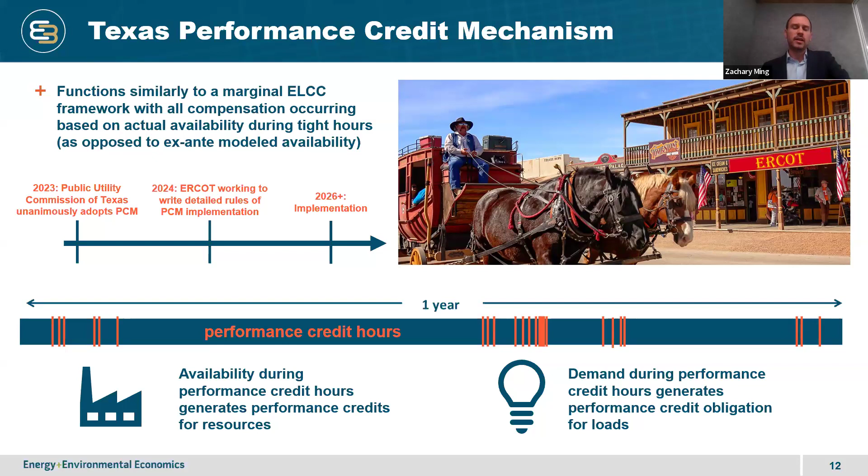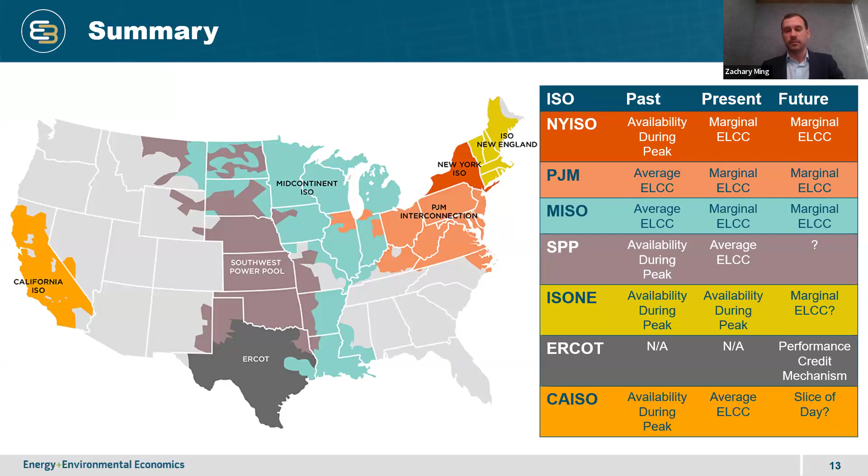So with that, that's just a flyby of what's happening in all the ISOs. This is just a summary chart of everything I just talked about for what ISOs are doing now and what they're potentially headed towards. Again, this is such a live issue, it'll probably be out of date here in another week.

So just keep that in mind if you're planning to put this in your library for the next few years. And before I wrap up, I did want to just talk about a couple of other issues. One is around thermal. This move towards marginal ELCC was ostensibly driven by the need to more accurately accredit renewable resources and storage resources, but it's equally as important for thermal resources.

And the reason is because thermal resources, as we've seen in recent years, can suffer from highly correlated outages. When it gets cold over a region, large portions of the entire thermal fleet can fail. That does not look too dissimilar from an operational perspective than a large-scale cloud going over an entire region and making solar go away, or the wind stopping blowing over the large region.

And that's what limits the reliability contribution of those resources, right? Large correlated outages. The biggest one is the sun sets every night. That's a large correlated outage for solar in the evening, for all solar everywhere. Similar impacts can be observed for thermal. And so that's why increasingly it's not sufficient to just look at average outage rates for thermal, but to look at, can these resources all fail at the same time? And how can we incorporate those risks into their modeling?

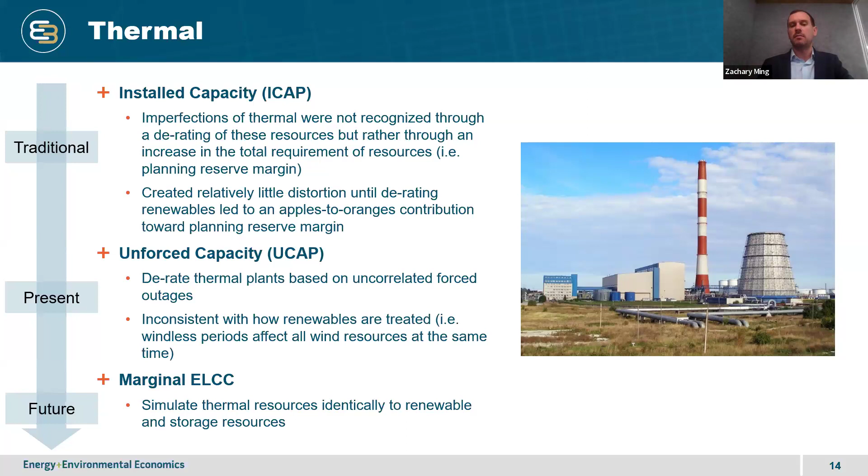That's exactly what PJM is doing. And you can see here, this is some illustrative values of how marginal ELCC values might change over time. So the capacity accreditation of different resources on the left. But if we just look on the right, this is actually some live results from PJM. And you can see that if we just scroll down here to the bottom, you can look at, for example, a gas combustion turbine having a marginal ELCC of 62%.

That means that these resources during the times in which the system most needs them are 62% available, which is a lot more available than nothing, but not anywhere close to the 100% that traditionally we've assumed these firm resources that you can turn on are available when you need them. And that is fundamentally driven by the fact that there have been multiple time periods over the past 10 years in PJM where a third or more of the entire combustion turbine fleet has gone offline when they're most needed.

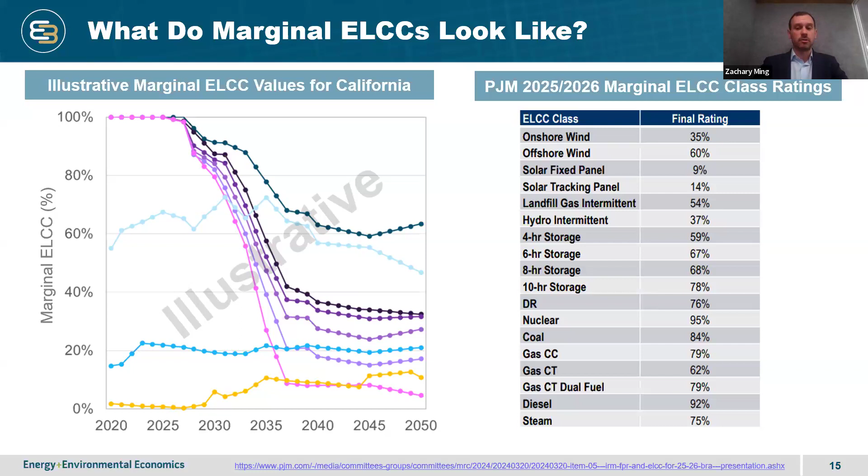Right? We've observed that in the polar vortex. We've observed that in Winter Storm Elliott, 30 to 40% fleet-wide outage rates for gas combustion turbines. And that's ultimately coming home to roost in these marginal ELCC values.

I will just talk, there's so many nuances to actually implementing these capacity accreditation methods. One of the things that we also think is really important at E3 is having a really robust performance penalty structure. Ultimately, what that does is it takes a lot of pressure off of the modeling and upfront accreditation for renewables. If you're going to hold resources accountable for showing up as they've been accredited, it prevents resources from wanting to seek over accreditation because they know that they're going to be held financially accountable for showing up.

And so having a very predictable, stable, and stringent and robust performance penalty mechanism, we think is very important to kind of take in a little bit of the pressure off of the ISOs to get capacity accreditation perfect. So that's one thing that ISOs are actively working on. There's a lot of other things that they're working on as well.

The nuances of implementing these capacity markets is constantly changing. People are thinking about, do we want to run auctions on an annual or a seasonal basis? Do we want to do it right before the year or a couple of years in advance? How granular do we set resource classes? So these are all the things that ISOs are thinking about in the detail. But again, this is kind of a level down from just the big picture average versus marginal ELCC that we talked about. And again, I think there is a consensus towards marginal ELCC.